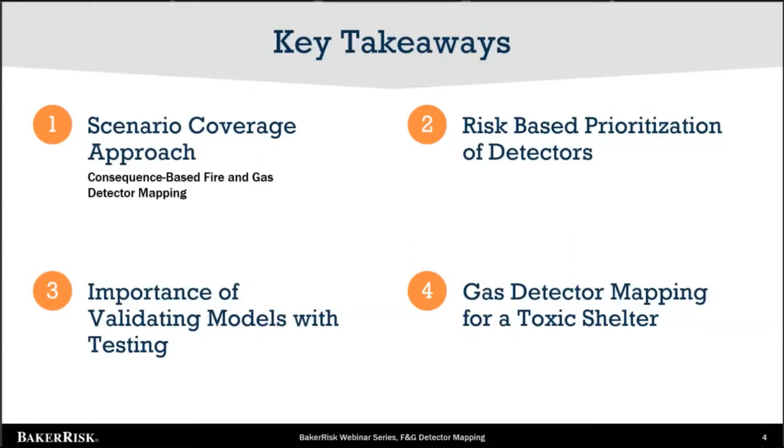And then finally, we will talk about gas detection mapping for a toxic shelter. So based on this, the outline of today's presentation will start with a brief background on mapping. We'll talk about consequence and risk-based approach, that's the methodology we will discuss. We'll discuss the research that Baker Risk has conducted on scenario coverage, and then finally we'll talk and finish with the gas detection on toxic shelters.

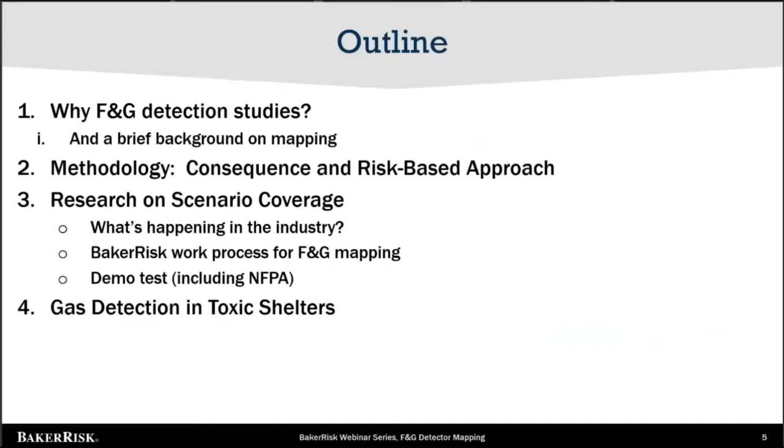So the question that we're trying to answer today: why is fire and gas detection study important and how to conduct it?

In any processing facility, the whole idea is to produce whatever you're manufacturing in a safe manner that protects your personnel as well as your assets. And the means of doing that is through ensuring that the product, the hazardous product that you may have, stays within the pipe, the vessel, exchanger, or basically no breach or no loss of containment. But as we all know as an industry, loss of containment events happen time to time, and we have to plan for that.

The first line of defense is how do you detect if a loss of containment event occurs? And that's going to be the topic of interest. We will also touch on some of the response and how it's important to ensure that when you detect, what actions you take based on it are as crucial as the detection itself.

In addition, what has happened recently in the industry is a movement of personnel outside the process areas to ensure their safety. This means there is less visual and knowledge about what is happening in the field, whether there is a leak or a small fire, and it takes time to detect that if personnel are not on their operator rounds, staff is low, or they are sitting in a control room maybe 1,000 or 2,000 feet away. In all those cases, the fire and gas detection system facilitates a prompt mitigation response and gives you that initial visual of what is happening in the field.

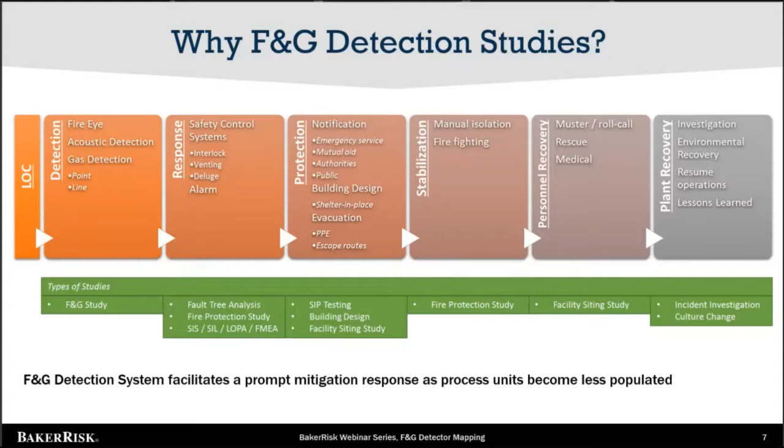Now, the question is, how do you decide which detectors to choose? You have gas detectors, fire, acoustics, and others. The questions that come up generally are: how many detectors do I need? Where should I locate them? And what type of detectors do I need?

The idea of consequence and risk has been in place for many decades. We want to try to leverage the information that your site has generated over a number of years through consequence modeling and risk calculations, and help do the detector placement with the knowledge of the hazards.

So a brief background on what's happening in the industry. Why is it so hard to perform these studies?

HSE has said that based on 8 years of offshore data, 60% of the known releases were detected. This number is slightly old, and maybe with the advent of technology and the knowledge of gas and fire detection that has increased over the years, this number has probably seen a little bit of an uptick. But even then, you would not expect a significantly high number of releases still being detected.

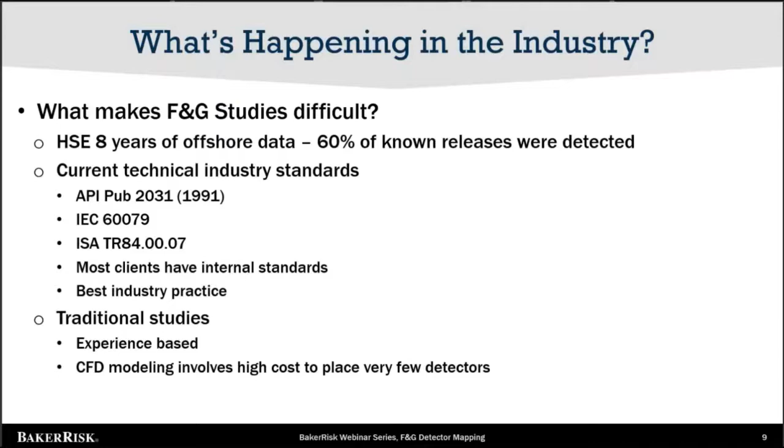So let's get a couple of definitions. ISA Technical Report 84.00.07 - and for those who may not be familiar, S84 or ISA 84, IEC 61511, is the standard for safety instrumented systems. The first version came out in 1996, and the latest version came out a couple years ago.

Under that umbrella of the S84 standard, there are multiple technical reports. One of them, Technical Report 7, focuses on fire and gas detection, and it defines two types of coverage - coverage meaning how well your detectors are covering what you want to cover.

In geographic coverage, as the name suggests, you are concerned about the fraction of the geometric area or volume of a monitored process area. So whatever hazard, area, or volume you're trying to cover, if a hazard were to occur in that particular location, would your detector be able to detect it, in that particular voting arrangement? You may have 1 out of 2, 2 out of 2, or 2 out of n voting. In all those scenarios, is your detector successfully able to detect and send a signal to your control system? In other words, simplistically, it's the percentage of area that's covered.

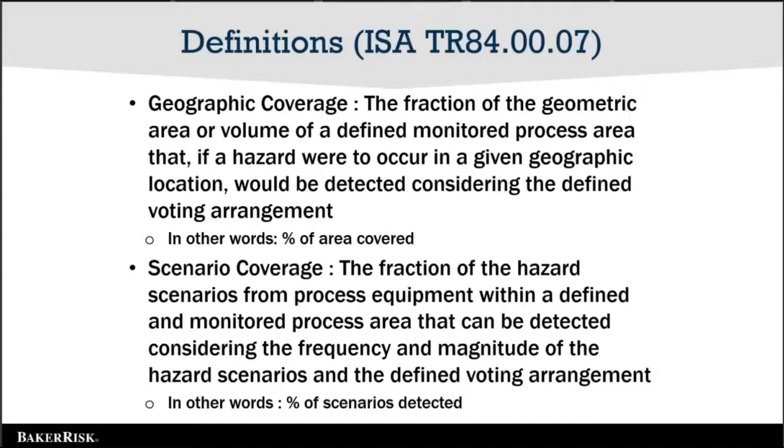So how is Baker Risk doing this? Baker Risk assists our clients in the placement and optimization of detectors. We've created a proprietary software called Fire and Gas Tool, or F&G tool, that looks at and does the placement and coverage in a 3D environment. We are able to import the consequence and risk results from the consequence and risk software. For Baker Risk, that's SafeSite. And then we optimize the detectors and give you a detector coverage value, and then the steps following that.

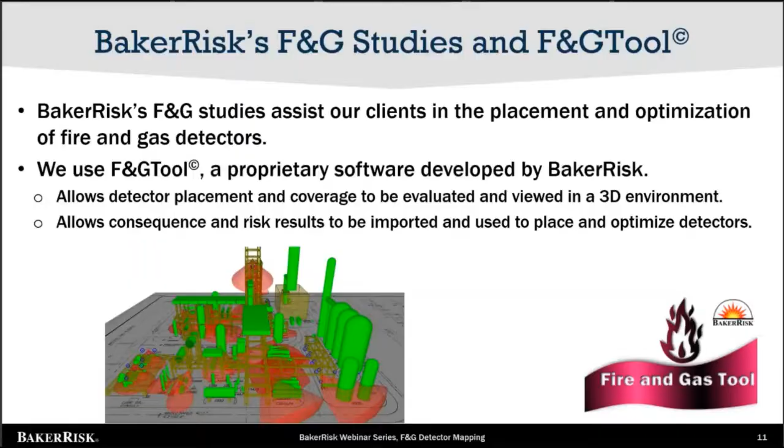So let's talk about the methodology, both the consequence-based and the risk-based approach. This is a typical workflow of a fire and gas mapping study. The first and most crucial thing in terms of defining whether you have a successful project or not is defining the performance criteria.

It's very important at the early stages to realize what you're trying to achieve from your fire and gas system. Is it to cover a location that's extremely remote, where there are no people out there, and you want eyes and ears over there and very quick detection? Or is it where this is a supplemental system in addition to other leak detection systems?

Whether you will alarm based on it, whether you will initiate a shutdown, or whether any type of venting action needs to begin, or worst, if there is an evacuation that needs to occur based on this. All those things help define what set points you will need for your alarms, and then what actions you will take based on those different set points.

So once you have a performance criteria that's defined, accepted, and agreed to, then you start with the next step of defining or designing the model. You can use the information from your CAD drawings. You can import from 3D softwares in STL or AutoCAD 3D type models. But based on the P&ID reviews and the CAD drawings, you prepare a preliminary model of the facility.

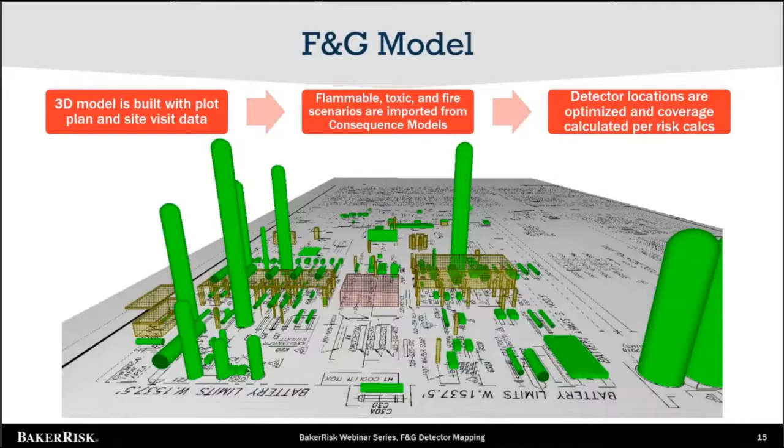So this is an example. The 3D model is built with plot plan and site visit data — the vessels, buildings, structures, pipe rack, etc. Then the flammable, toxic, and fire scenarios are imported from the consequence models. Finally, detector locations are optimized and the coverage calculated as per the risk calculations.

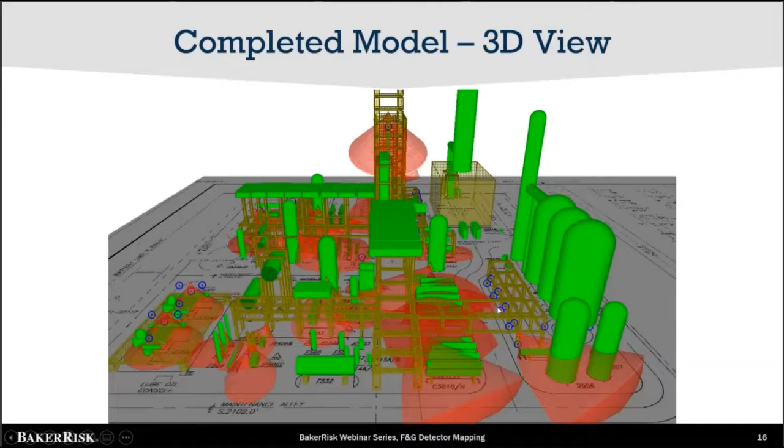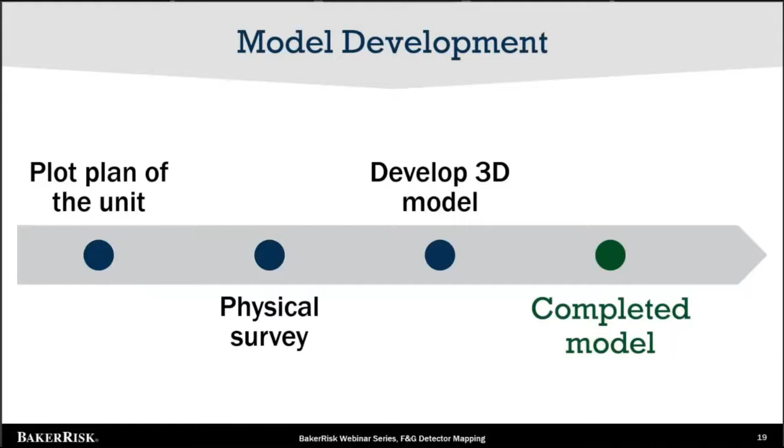Next couple of slides, I'll show an example facility that we've analyzed. We looked at the plot plan of the unit, did a physical survey, and developed a 3D model before we went to the site, then completed the model once we went to the site and found any changes or discrepancies that we needed to cover.

On the top is the process facility, and just south of that, at the bottom, is the residential campsite. This particular facility is in a very remote location and needs personnel to live out there for significant periods of time. This makes the detection analysis extremely crucial because the lives of a lot of people are immediately at risk in case of a release.

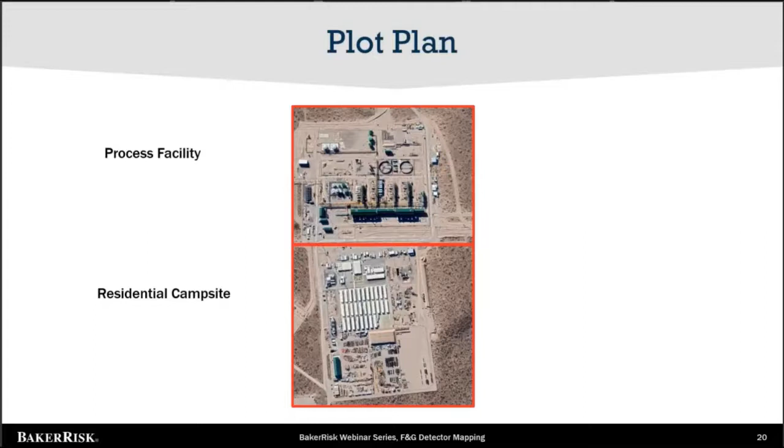The site was very cognizant of the hazards, and they wanted us to do as much as we could in terms of voting mechanisms and coverage, to prevent two things: a safety hazard, but also to minimize unnecessary shutdowns of the whole facility.

This is a completed model, a 2D model of the facility. As you can see, there are pipe racks going east-west here. There are compressor sheds, pretty large compressors, close to 15 of them in that area. There is a loading rack here, and then there are all these different trains of process. There are some storage areas as well on the top left side.

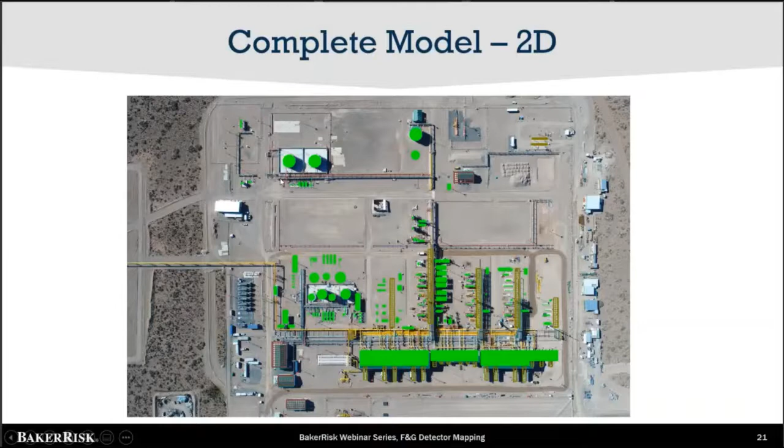All that is modeled in 2D, and then this is what it looks like in 3D. You can also see some of the buildings here, and one of the buildings is a control room. As you can see, it's close by, and can be in the line of hazard. That's why it's very important to realize what your hazards are and then define what your detection is going to be.

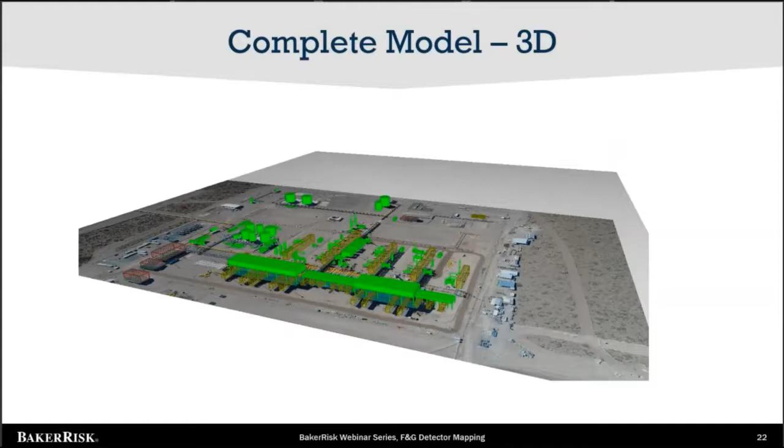The next step is understanding the consequences. We take all the flammable contours from the consequence model and run them for each piece of equipment. What you're seeing here is a composite contour for the facility based on 20% LFL. The orange is the LFL, or lower flammability limit, and the red contours are the UFL, or upper flammability limit. The reason you don't see the green, or 20% LFL value, is because it engulfs the entire site.

However, this is a composite contour. Each piece of equipment has its own contours that are built in 16 different wind directions, and that is also considered in the analysis.

The reason for the 20% LFL is because that was the set point agreed to during the early stages of defining the philosophy for this site.

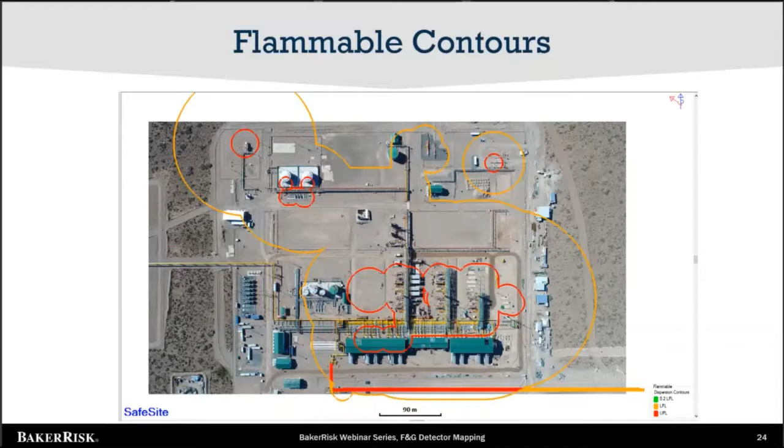Thermal contours show the different thermal composite contours, and the 37.5 kilowatt per square meter is generally of interest because that's where your structural steel starts giving up, so you definitely want to look at heat detection there as a means of detection over a large swath of area.

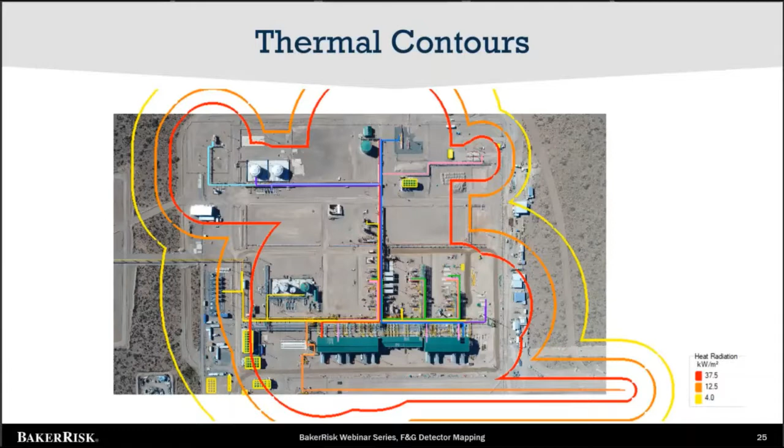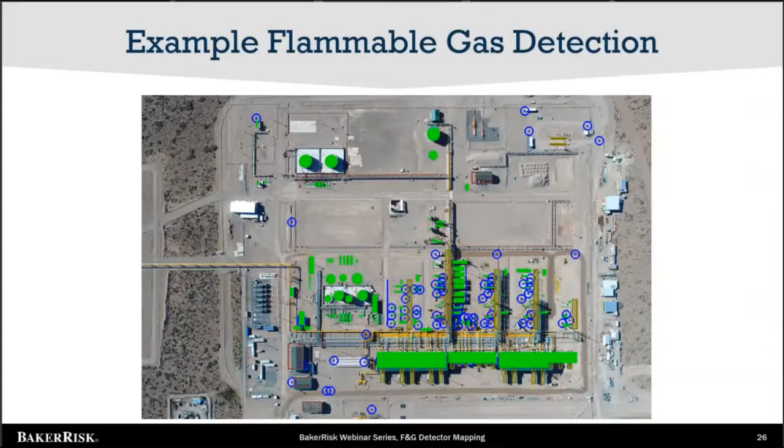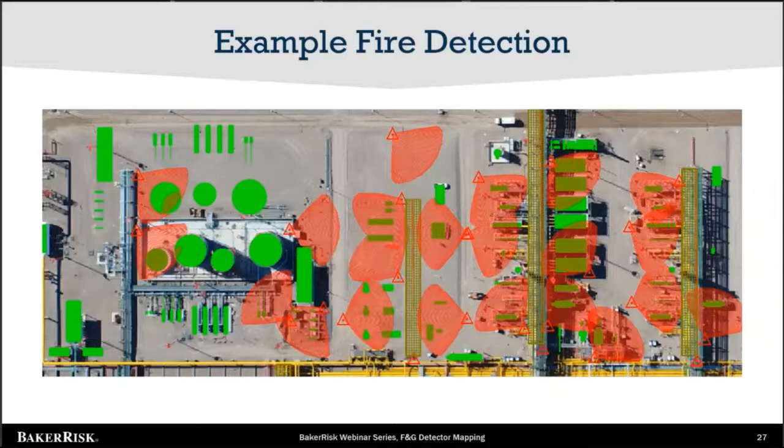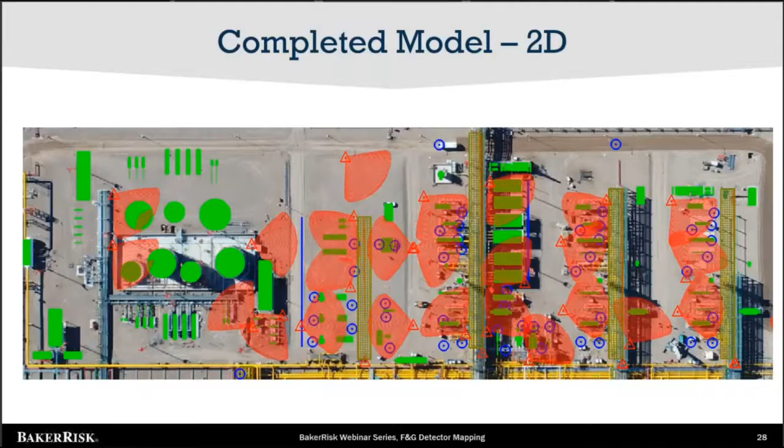So this is a completed model in 2D, which has your gas detection, flame detection, and open path detectors as well. There were no toxics on the site, so we did not have any toxic detectors here. You can see there are some open path detectors here, and some south of this facility as well, that we ended up putting in to make sure that if there is a release going towards the campsite, it is detected. So again, this is a 2D model of the facility with all the detectors in place.

So we talked about consequence. Let's talk a little bit about risk. We follow two approaches. One is, of course, defined by the TR84.00.07. In that, there are three main components. It says that detection coverage is important, because you want to make sure you are able to cover either the scenarios or the area or volume of interest. But also, what happens after that? Once you get the signal, is your control system or whatever controller you use adequate for the purpose? Can it take the actions and give you the availability of your fire and gas system? So whether it can take the signal and initiate a shutdown, initiate your deluge, or whatever action you take based on it. And then finally, if all that happens, is that still effective as a mitigation?

As you can see here, the example of a propane bullet at normal ambient conditions of 90 degrees Fahrenheit, close to 30 to 32 degrees Celsius, and 160 psig. If there is a pump supporting or downstream of that, if there is a seal leak from the pump, then it can cause a BLEVE scenario. And in those cases, there is protection. So there is a fire detector located here, which can initiate a deluge system.

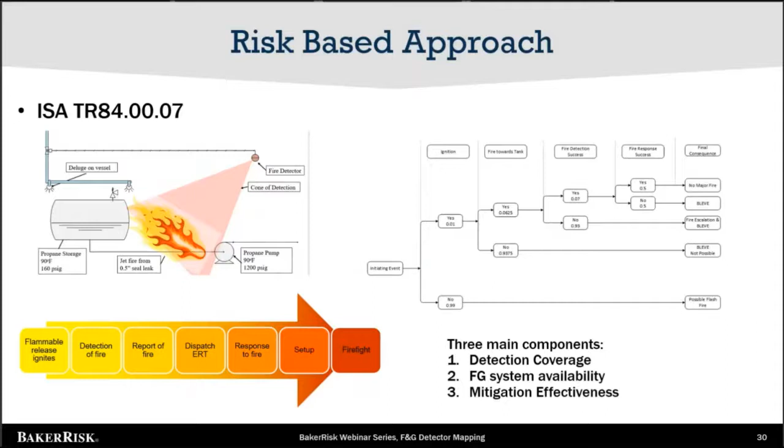The other approach is a QRA or a risk-based siting study approach. Many sites have been doing risk-based siting studies for the last decade or more. And you get a lot of valuable information, like the societal or the individual risk results. Those results will help prioritize which detectors you want to place first. The method is identifying your high-risk sources and then looking at where, and maybe creating some thresholds, an example threshold value.

Again, please don't use these values. These are example values that you can place into different buckets and say, these are my high-risk sources, and I want to cover them first because I have a limited budget. I don't want to put 100 detectors for my site this year, but I can afford 30 detectors this year, maybe about that much next year, and then the rest I can finish up in the third year. So this can help you prioritize and make sure you get the most value for your detection system.

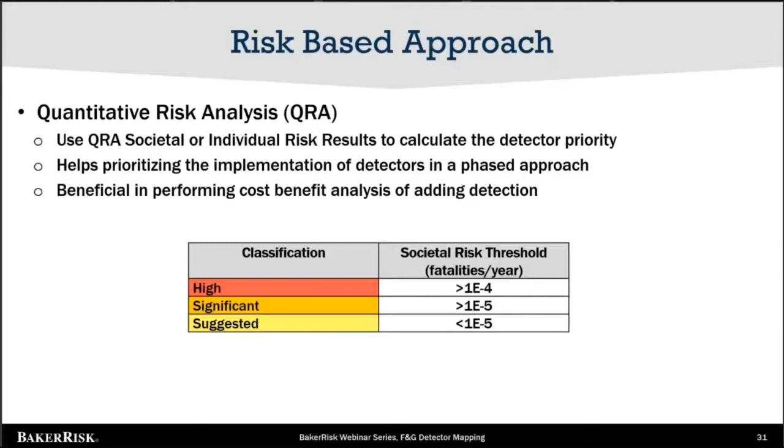The next topic is scenario coverage research. Let me give you a brief background of why we got here. When we've been doing this work for a decade and probably more, what we were finding is that there was a false sense of security based on placing these detectors in the field.

Like any other technology, there are pros and cons of detection technology. It's very important to understand the limitations of those technologies before you can assume that you have X percentage of coverage. Let's say you have 90% coverage. But if you don't know the basis of that, then it becomes extremely hard to figure out and have a successful implementation. So some of the key things we were trying to answer: what happens with different release directions, what happens with fluctuations, what happens with different weather and wind conditions.

So that's why we started doing some research, and we decided to do a series of tests to answer those questions. We did a total of 74 tests for releases with saturated propane, starting from half an inch going up to 1 inch. We did it in different orientations: horizontal is the downwind, west and east is the crosswind, vertically up and vertically down. And then we used 14 detectors in a grid pattern, located 60 to 200 feet, or about 20 to 60-70 meters, from the release point. We used 3 different manufacturer products.

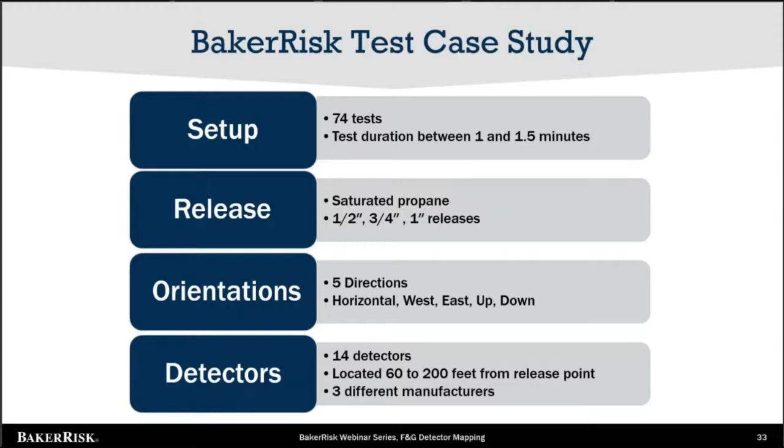The first 5 tests were to determine if there is a difference in response times with and without weather baffles. This was from our understanding perspective, because in general, weather baffles are going to be installed on pretty much anything out there within the weather conditions. But without that, is the sensor quicker, and are we getting the responses faster? So this was just our understanding of how the technology behaves.

The next 5 tests were to determine the different types of detectors and the response time so we could analyze properly. Then finally, the main set of tests were conducted randomly in different weather conditions, different wind conditions, days, nights, spread out over multiple weeks, in a random pattern, so that we could analyze it and determine the response characteristics.

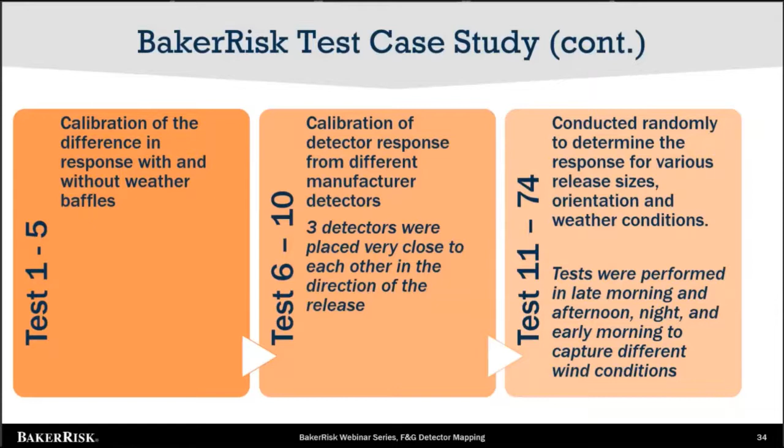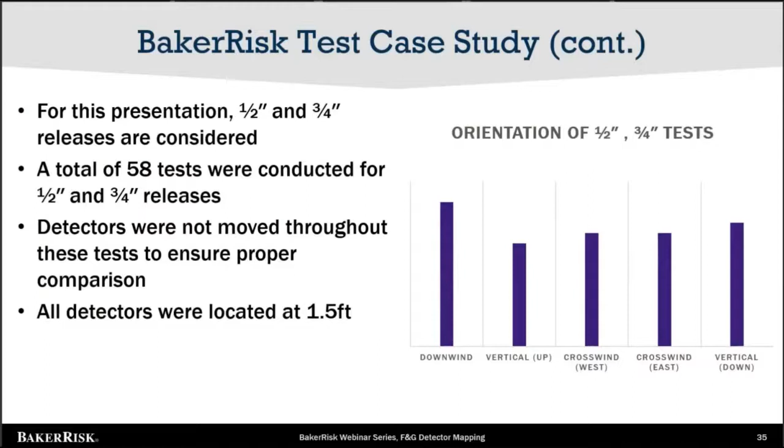For this presentation today, we'll limit ourselves to 1/2 inch and 3/4 inch discussion. We conducted 58 tests total. The detectors were not moved. They were all at 1.5 feet, or about half a meter.

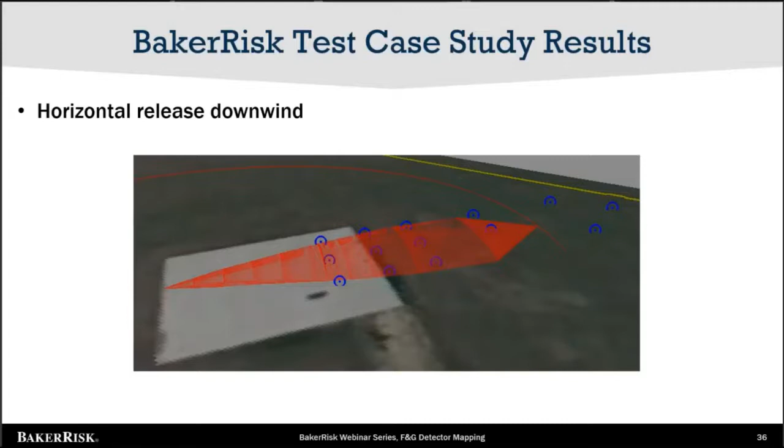So this is the video of saturated propane being released on our test pad. And as you can see, the gas goes and interacts with the gas sensors out there in the field, and we were logging those values continuously in our historian.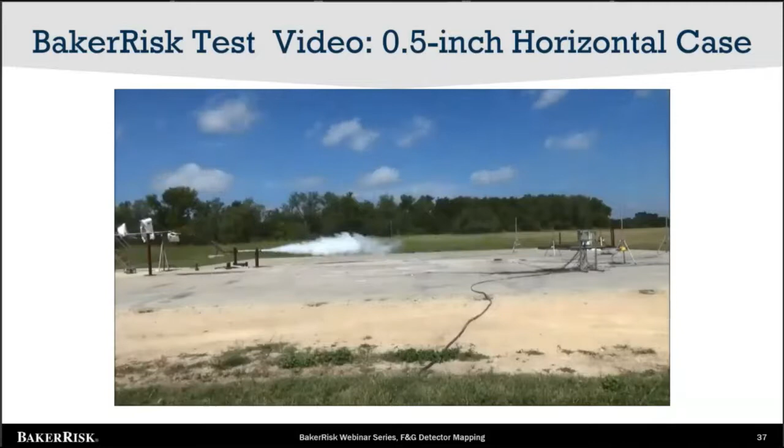The considerations here were the initiating event frequency is, of course, 1 for this scenario. The probability of wind in the direction of release is considered 1 because the winds were steady and in the predominant wind direction as well. Based on these considerations, the scenario coverage was calculated for each of the 5 release directions, and then cumulatively for all 5 directions under different wind conditions.

So the results, as you can see, the downwind releases were able to be detected with 1 or 2 detectors, but the response times varied significantly based on 1/2 inch versus 3/4 inch releases, and that's expected. The vertical up releases, as you can see, we're not able to detect any with 14 detectors in pretty close vicinity.

The crosswind releases going opposite from the release point, we were not able to detect, but the one going towards the east eventually made its way back to the detectors, because initially you have the momentum of the jet, and then eventually when the wind takes over, it still ended up at those detector locations, and we were able to record values. Then vertical down, we were seeing a lot of pancake movement that eventually also led us to these detectors.

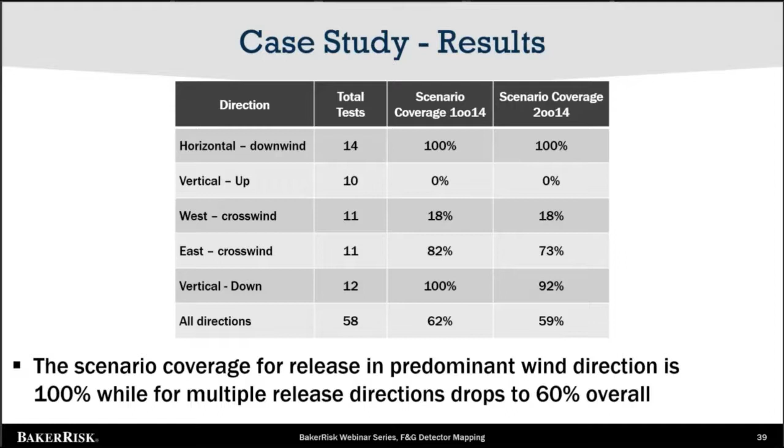We were also contracted by NFPA under the Fire Protection Research Foundation to do testing on different types of material with propane, methane, saturated, and vapor to understand the impact of deluge on vapor cloud. We had about 28 gas detectors located in the field at different locations, both in the cloud center line and in a fan arrangement 10 feet away in both directions from the cloud center line.

Here we were, of course, trying to understand the impact of the deluge on the vapor cloud, but we were also trying to learn the impacts of condensation, what happens after the sensor gets saturated, does it come back to normal pretty quickly, and the response characteristics of that.

But the full report is on the NFPA website, and at the end of the presentation, I'll share a link to that report as well.

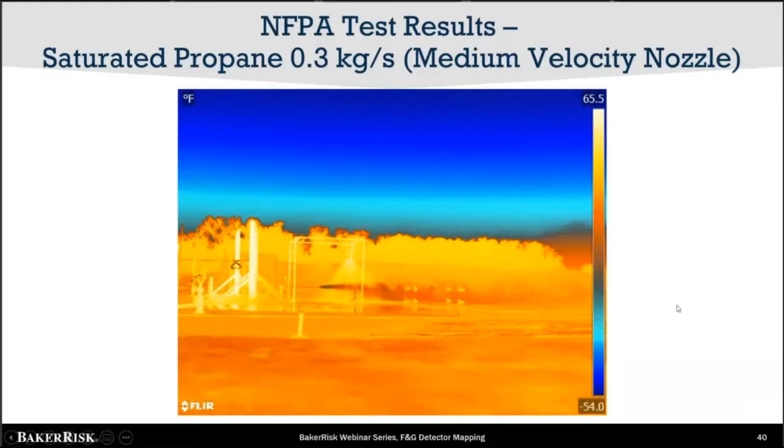So we've talked a lot about flammable gas detection throughout this presentation today. Let's take some time to talk about toxic gas detection.

Many sites may be using toxics as a raw product, or they may be producing toxic material like ammonia or others. And for those sites, as well as sites neighboring to those, it's very important to have a very robust detection mechanism to ensure that your folks are able to go to safety.

To the topic of performance-based gas detection, what triggers someone to go into a toxic shelter? So one is visual, right? If someone sees that there is a toxic release, they may radio other folks and say, hey, move to shelter. And in many cases, if the leak is small enough where it's not visual, or it's hidden, or people are not exactly at that location, then it becomes harder to detect such releases.